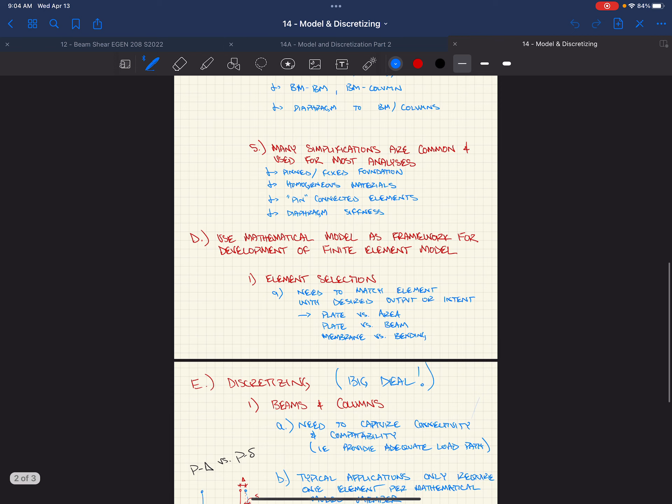So we did get through modeling and discretization, right? These huge jumps that we're making from the real world to the mathematical model, and then finally we're taking that mathematical model and discretizing it, putting it into a finite element model. We try to match everything as close as we possibly can, in an effort to highlight the thing of interest that we're trying to get out of our model.

Whether it's the base reactions, whether it's the reactions in a beam to design a beam in a braced frame, connection demands in a moment frame, right? If we're designing the foundations, we might do something different. Everything is tailored to what we want to get out of our model. So we make a lot of simplifications, which we did.

When we're doing that, documentation is incredibly important. I asked for some of that in the homework. I haven't looked at those yet - I'm a little scared at how brief those are probably going to be, right? You cannot have too much detail in those. Why would we want to document it? There are 5 reasons why you would want to document it.

Give me - yes, Brandon. Not get sued. Not get sued, litigation. Solid.

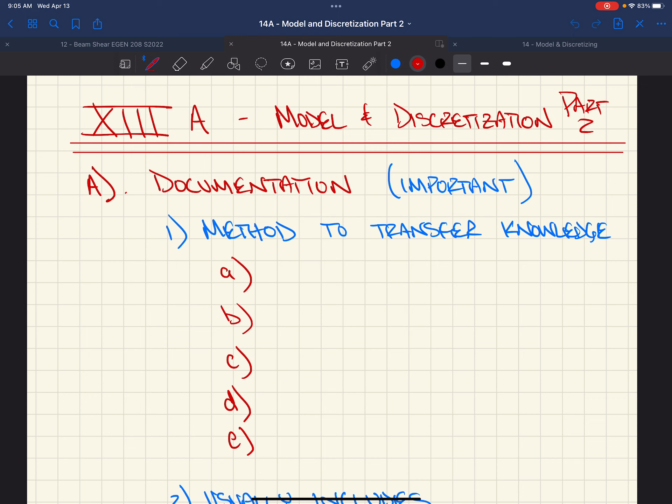This is huge. We had a project at the Yellowstone Club we were doing - it was essentially a bunker underground, okay? And the contractor messed up, they used the wrong strength concrete. It wasn't strong enough. It ended up going to lawyers.

Because the contractor was dead set on the fact that we were over-conservative with our calculations. We had to package our calculations up and send them to 2 other reviewing structural engineers who had to do third-party reviews to verify whether they felt what we did was reasonable, and whether there were any other ways we could get around the fact that we needed 4,000 psi and they had 3,000 psi sitting in place.

They screwed up when they sent the mud, so when they were testing it, it came out short - only 3,000 psi. They ended up having to water blast out this entire underground bunker basically.

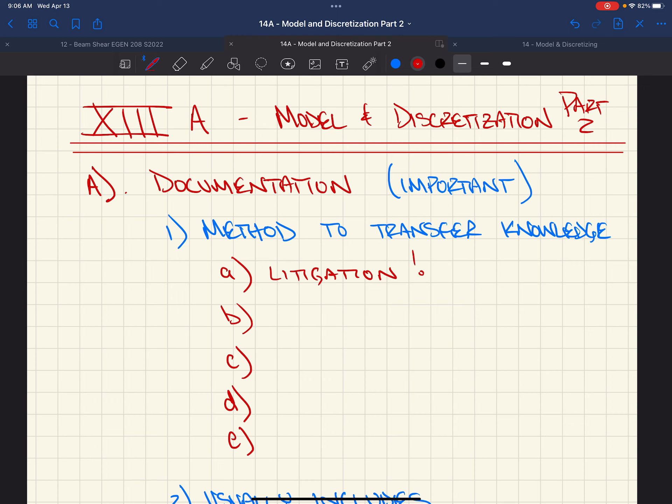Super expensive. So we wanted documentation. In that documentation was a lot of what we'll show here in a little bit - written language talking about what we were doing, but also little diagrams of the model. There was a model of concrete posts and beams, figuring out stuff, telling them what we used where, what the material properties were, right? All of that.

And so litigation is huge. Is there another part of what we do that would help to have documentation?

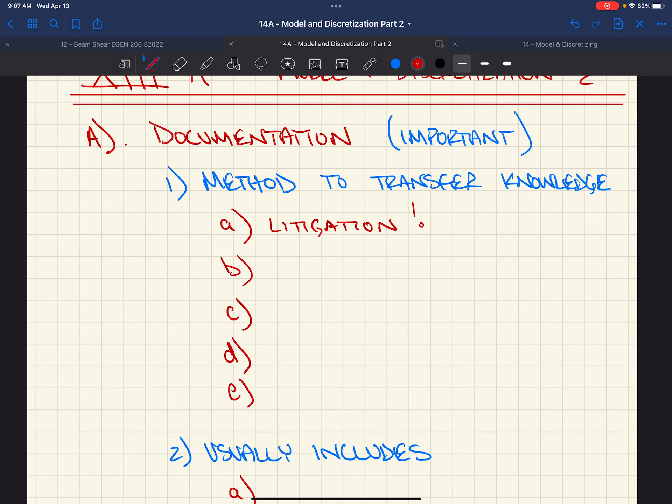Yes, Brandon. Honestly, just communication between coworkers during design. Dude, fuck yeah. You know, Brandon's really crushing it today, guys. I might just give him a password.

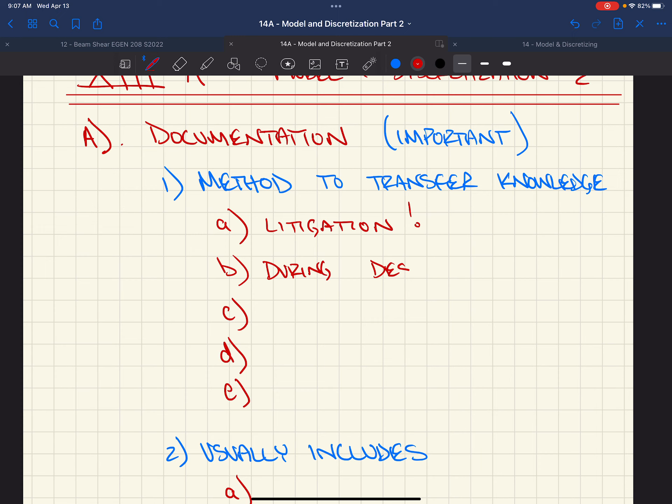All right, step it up. Step it up. What's another one?

During design, you might not be working on the same project throughout its entire duration, and you might take your calc binder and pass it over to somebody else. I did that when I quit. I had multiple projects I was working on, I had calculations I was working on. I just said, okay, here you go. And they needed to be able to go back and figure out what I was doing. Another one, kind of related, is coming back to a design after a long time.

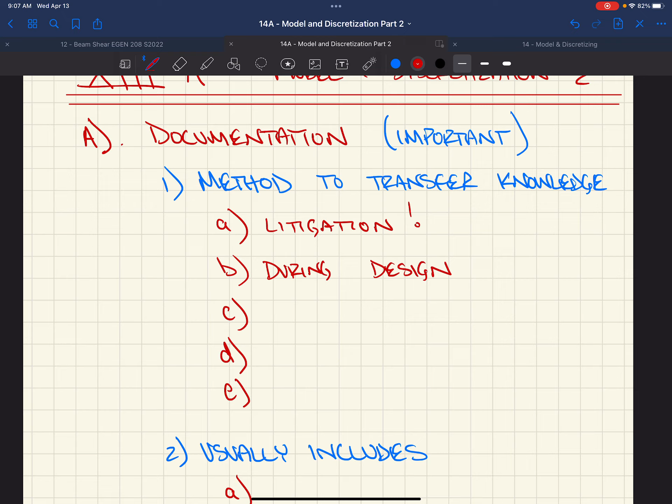Man, you guys are really crushing it. Retrofits. Renovations.

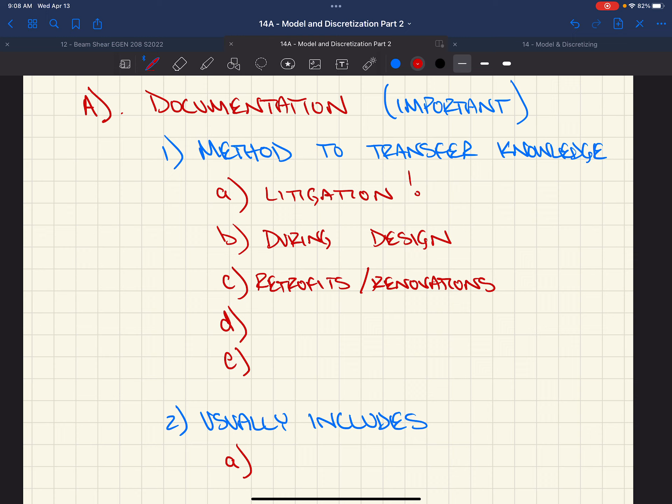There's been multiple projects where, more commonly when I worked there, we would get a phone call because the owner, when they looked at their documentation for their building, the structural drawings had our name on it. So then they came to us, and most of the time we could go back into the archives, basically a big storage room with a bunch of files, and pull out that calc binder for that project. So we started ahead, and that's the reason why they called us, since we designed it in the first place. Can we put a piano in this living room? Can we do this? Can we do that? Can we knock this entire wall out? So definitely, it's good to have documentation for retrofits and renovations.

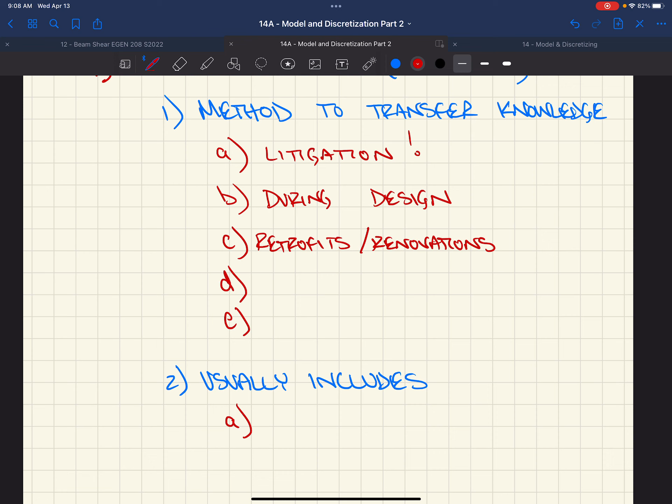As I mentioned, give me another one. Permitting. What's that? Permitting. Yeah, I guess I was gonna say construction admin.

Administration, they call it CA, that's the lingo, construction admin. When you're out there running a project trying to get things done, the contractor omits something and forgets to do something. Maybe they put 3 anchor bolts in and needed 4. Maybe they don't have enough projection to get a plate washer on there that you asked them to put on, like in a brace frame or something. So you need to be able to go back to the calcs and figure out, how did I do this? What was I doing? Can I omit this? Can we not omit this? How can we change things?

So in the construction admin side of things, future projects. I was gonna say third-party review. I said retrofits, renovations, we can call this future projects.

Any of the buildings on MSU's campus goes to a firm called Eskil. They are in California. Because we have to get a permit from the city of Bozeman, and when you do any project in the city, you submit construction documents. They also require you to submit calc packages. So we would scan hundreds of pages of calcs, and they get sent off. The city of Bozeman, to their credit, knows that they are definitely not qualified to be reviewing structural calculations of that magnitude. So they send it to a firm in California that's all they do. Then they come back and say, you forgot 6.6.3.2.1 in ASCE 7. How did you account for this? We didn't see it in your calculations. That's how detailed they get sometimes.

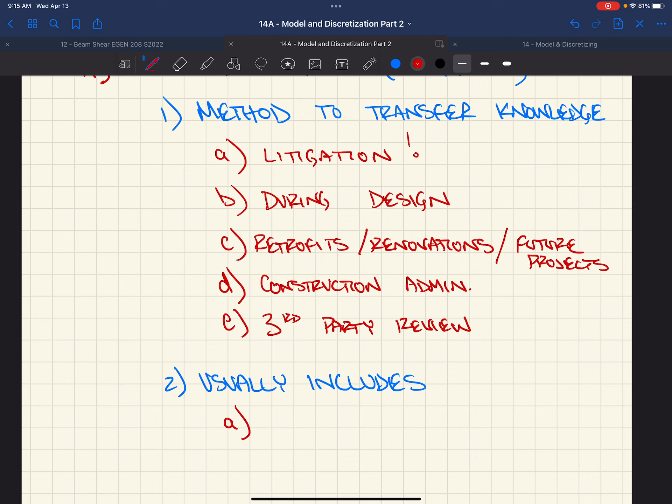So, all right, does that help, Ethan?

Yeah, cool. So, documentation - what does it usually include? Well, description of our mathematical model.

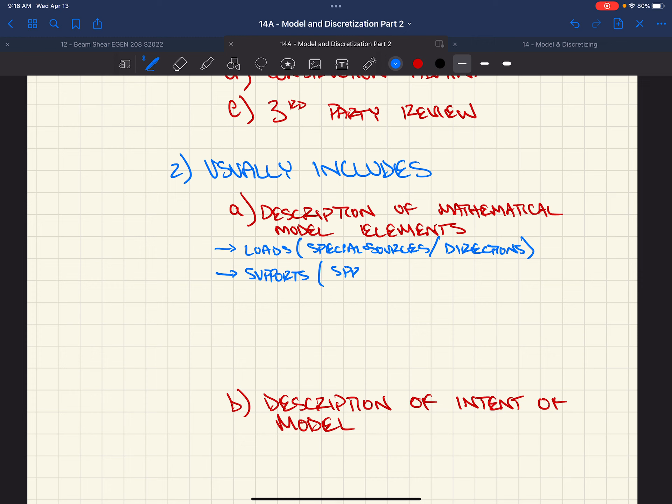What are some of the elements that we would describe that come from our mathematical model? Loads - are there special sources for these loads? Directions in some cases? What are some of the other elements in our models that we'd want to describe? Boundary conditions or supports. Springs. What type of fixity? All right, releases.

What other elements are out there? Assumptions - I guess I'm looking for real elements. Members - you want to describe members. Materials, especially with concrete, right? Releases, etc. We've got areas we use sometimes.

Spans, maybe loading type. Does it only load members? Does it load members and braces? A lot of times we have plates. Again, materials, releases - right, all important things.

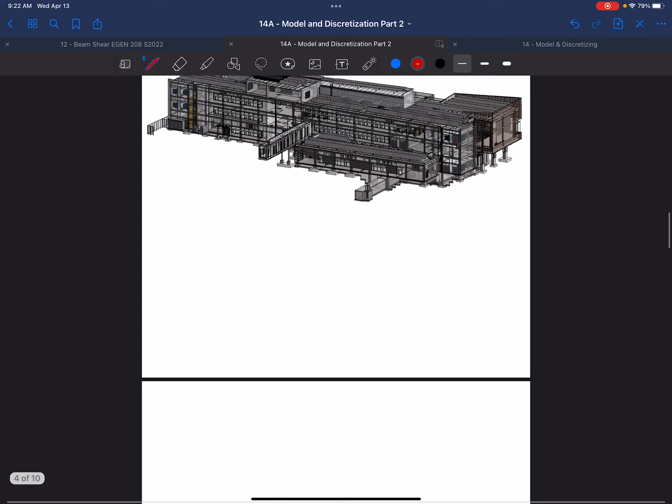Very helpful here - 3D views or renderings. Printing off the model in picture view, or even just the normal model, and putting arrows to it. So if we go back down to our model, being as simple as saying 'pin base column.'

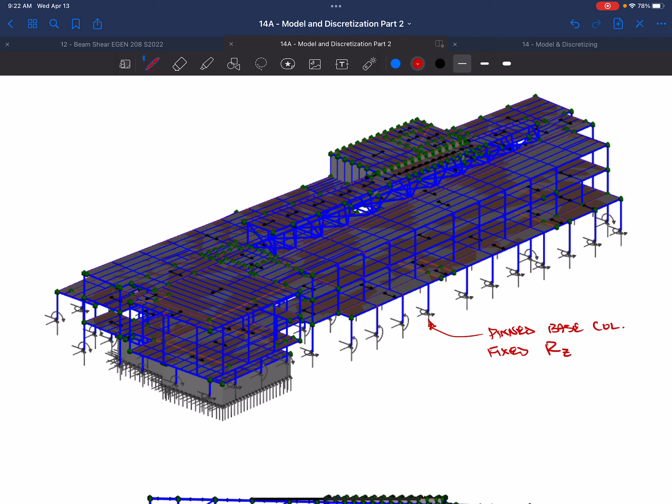Fixed RZ - yes. This is going to be off topic, but why did they choose to model it with those rigid links, to group the modal mass on the plates versus something else? Oh, you're reading the actual thing. Yeah, I was reading - trying to catch up. Well, I was just curious, why do we do that? We did that because we were trying to spread out that mass into the diaphragm the best we could.

Messing up your plate or something? What's the point of the rigid links?

So the reason why the rigid links are there is that it's an infinitely stiff member. In RISA, if you go and model a member, under the type of member, you have standard parametric, you have your database shapes, and also in there is an option to do a rigid link. A rigid link is an infinitely stiff member.

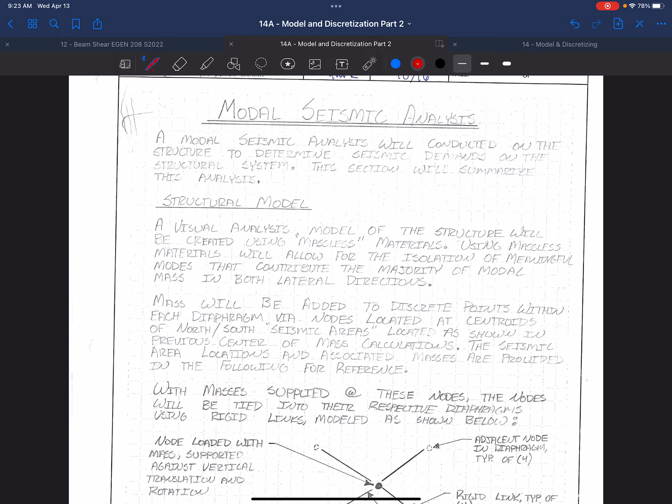So when it's fixed, it does not move, right? It's not going to deflect. It's going to be a straight line regardless of what its orientation is. So what did it do here? Well, it allowed us - and we did this on, this is NAIC, but it's also like Miller dining halls.

We put the mass of the diaphragm at a given point. If we loaded that one node - the reason why we're doing this is some of you guys haven't had dynamics - but seismic demand is all based on mass, right? So wind loads are based on projected area. Seismic load is all based on mass. We are physically accelerating based on the excitation of the ground. So the load doesn't come from outside, it comes from within each of the members in the building.

There's 3 different levels of seismic analysis. We have equivalent lateral force. That's saying that we're going to punt as engineers and be very simplified and say, okay, it's all based on mass. It's actually pretty complicated, but we're gonna just distribute the load at each of our diaphragms vertically in an effort to mimic what the building would look like if it just rolled over with what we would call our first mode of vibration.

The second one, which you end up having to do if your building is in certain categories and has certain what we call irregularities, then you jump into what we would call a modal analysis. Instead of actually physically shaking the building - we're getting to that point - before that they say you can simplify the analysis. It's going to be more in-depth than our punting method, where we're actually going to start considering the stiffness of our model and the mass distribution in our model.

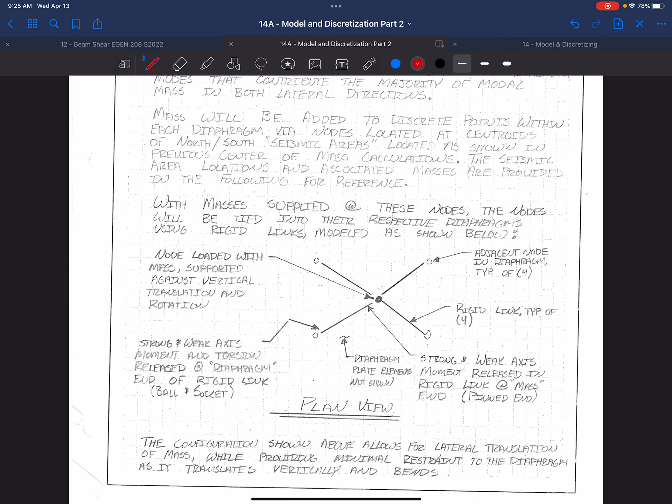So what happens if you leave self-weight on in the model? Any ideas? If you leave self-weight on, every member in this model has self-weight, has mass. If you leave that on, what do you think will happen? You get a mode for every single member, which destroys the ability to actually analyze it.

So as an engineer, you have to think about what am I really trying to capture out of this. Do I care that at, say, 150.2 hertz, this beam over here is gonna start vibrating up and down? That's really not gonna give me anything relative to what my moment frames in this building really care about. So what we decided to do was hours and hours of discussion of how to simplify the model effectively in order to capture the behavior of intent - the behavior of what's going on, or what we really want to see out of this, without oversimplifying.

So what we decided to do was, okay, we've got this mass. Most of the mass, we could say, lumps in the diaphragm. We're gonna take half of the mass above and below, and put it into this diaphragm. Now we're gonna start pushing on this diaphragm.

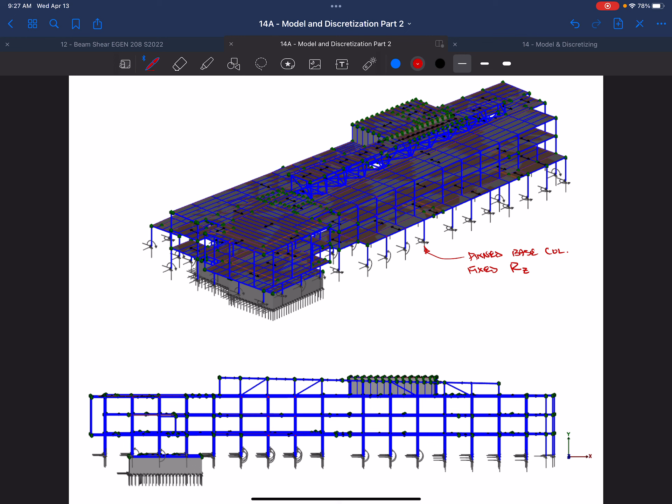Well, if we distributed that mass into all like 100 nodes around this diaphragm, we still are gonna get really weird natural frequencies that might be in the vertical direction that aren't gonna contribute to the lateral demands on these frames. So what we ended up doing was we would create mass on a node, and then reach out and connect it to our diaphragm. We had to connect it to our diaphragm in such a way that we're not adding to the stiffness of the diaphragm, but we're gonna be pulling on it. So that's what this is all about - we've got a node with mass.

And it's sitting out here, right? We're gonna put it out in the center of mass of the diaphragm.

The other thing in modal analysis you have to take into account, in seismic design, we're guessing at where the mass is. As engineers, we're making a lot of guesses. That's why in load combinations for ASD and LRFD we have 0.6 dead and 0.9 dead, because we are guessing when we're designing Roberts Hall as to what it's actually gonna weigh now and also in the future.

It might change use, right? And so we do the same thing in seismic demand, the code recognizes the fact that we're guessing that we know where all the partition walls are, all the exterior wall elements, what everything is made out of. So we're not gonna be super accurate about where that center mass is, because the center mass is really gonna be where the force is, since it's all based on acceleration.

And so in this case, we guess where that modal mass location is. We're gonna do an accidental eccentricity value that the code requires us to do, 5% of the lateral dimensions of our building. So we end up starting to move this node everywhere.

Well, it gets pretty complicated if you had 100 of these mass nodes spread throughout the diaphragm, and we have to start moving all of these in all these different models. So we decided to say, okay, I'm gonna lump the mass in one point. On top of that, I don't really care about the diaphragm going up and down.

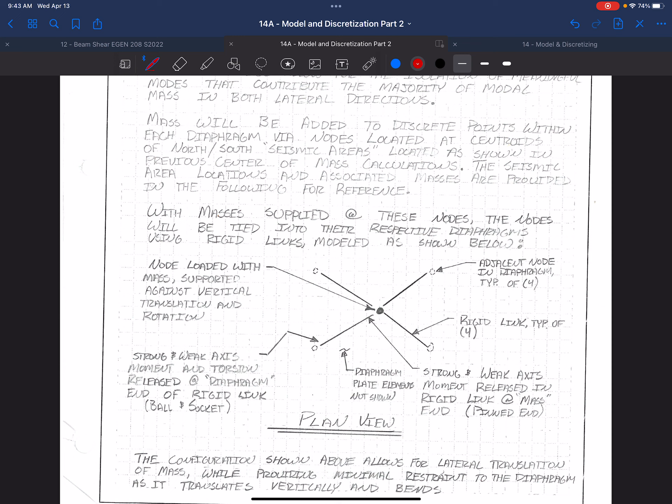it. Okay. So. You're down to 7 minutes.

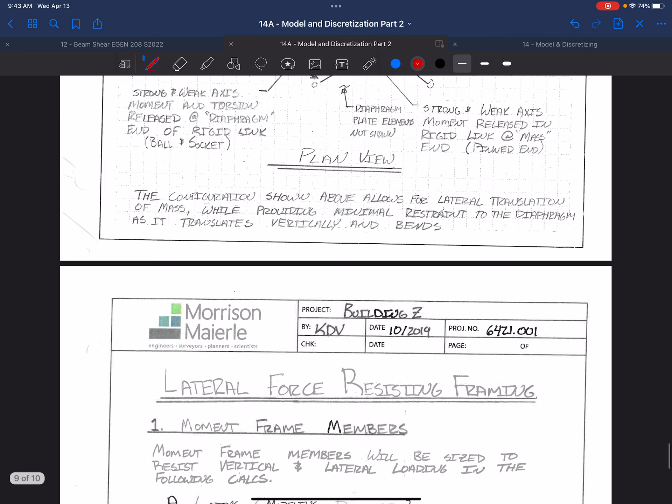So we've got these short excerpts from some projects at Morrison Maierle, some descriptions of lateral analysis, how we decided to model it, put nodes, and why we felt about it. With masses supplied at these nodes, the nodes are tied into their respective diaphragms using rigid links modeled as shown. The configuration allows for lateral translation of mass while providing minimal restraint to the diaphragm as it translates vertically and bends. We're explaining to someone reviewing this what the intent of our model was and why we did it that way, so we could defend it later on.

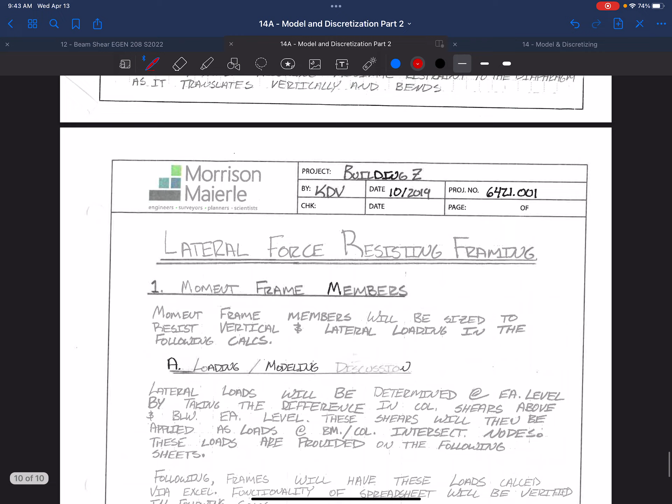In this case, all we did was take loads from a spreadsheet which allows us to take a rigid diaphragm. I don't know if you guys did that in concrete too. If you have a rigid diaphragm, you have a torsional contribution and a translational contribution of shear in each of your lateral elements based on the stiffness of that. We built a big spreadsheet that distributes the load based on the equivalent lateral force procedure.

Then the code makes us do other things, making sure we consider 100% and 30% in our two directions. That's also based on our vertical irregularities - we have two tables for that. Based on our irregularities, the code makes us hit our building with all the seismic load in one direction and 30% in the other direction.

With wind loads, they make us do a quartering load, which will give us 75% in our two orthogonal directions. On top of that, seismic loads, right? If our system isn't redundant, we got a 1.3 factor, all sorts of stuff. We talk about that if we're doing stability in this analysis also, so we reduce the stiffness based on section C, Appendix C. On the bottom it says 270 of 514.

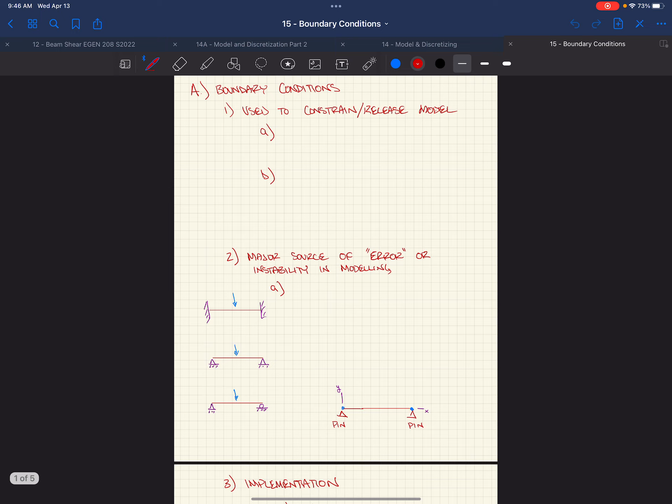Yeah, okay, so lesson there: make sure you document, document well. There's no such thing as not documenting, or documenting too much, right? Making sure someone can follow. That's a hint on the homework moving forward - making sure you document the models that you create.

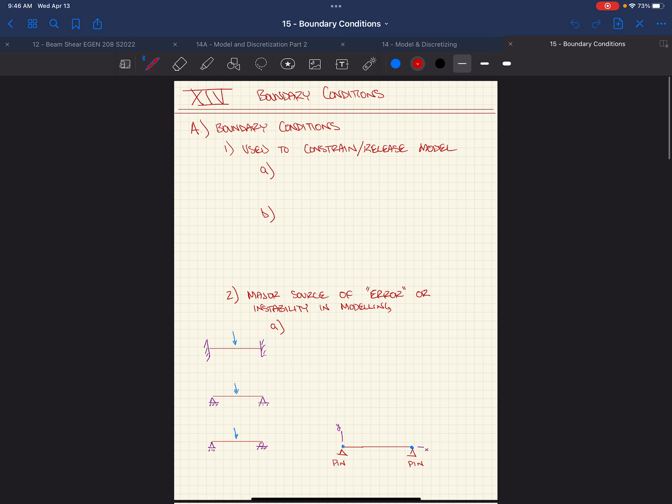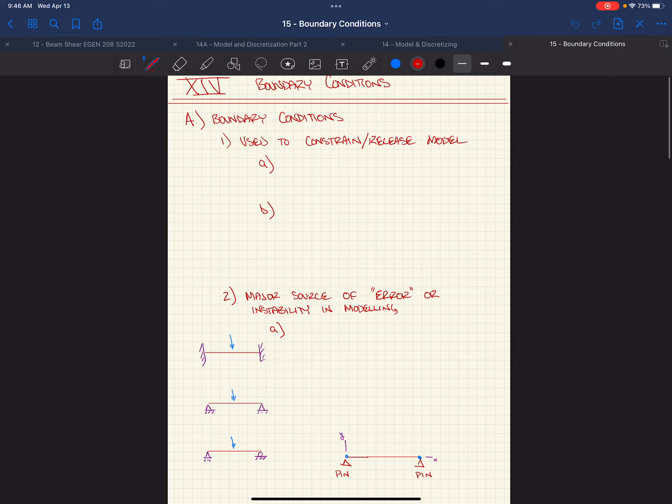Boundary conditions - this is a huge part of the overall modeling process. We use this to constrain or release the model. We do this because we need to provide global stability. We're taking the inverse of K, right, or RISA is taking the inverse of K. We cannot have that thing being singular.

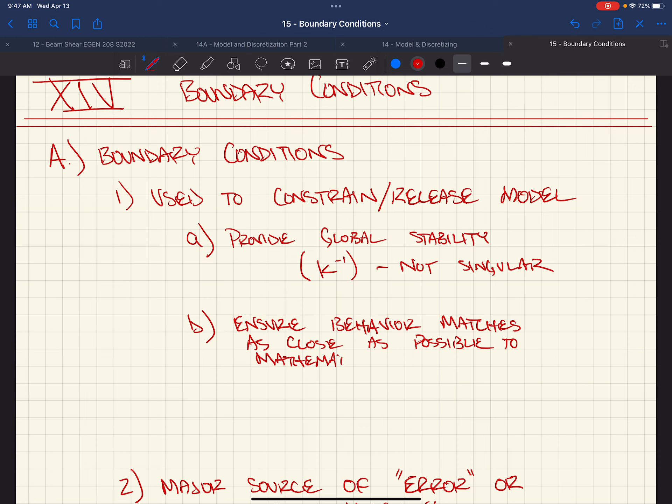Boundary conditions also - we constrain and release the model so that we can ensure the behavior matches as close as possible to the mathematical model. All right, we do this at connections and supports.

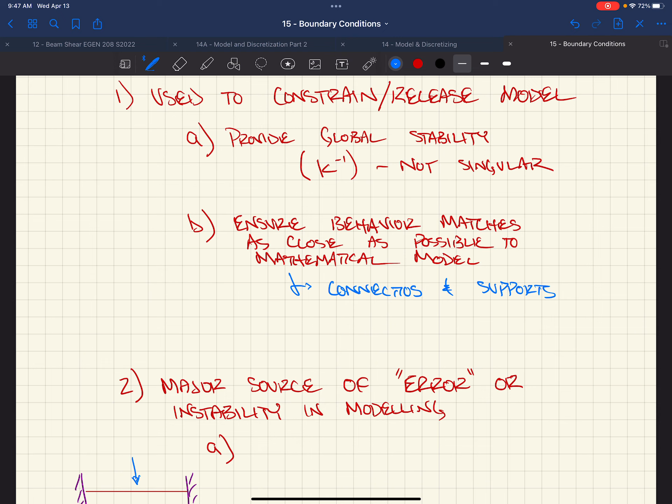And that's where we impose boundary conditions. We do it at nodes - this interconnecting of plates, interconnecting of members, where our model is ultimately supported outside. Our free nodes, where we have maybe just one element connecting to it.

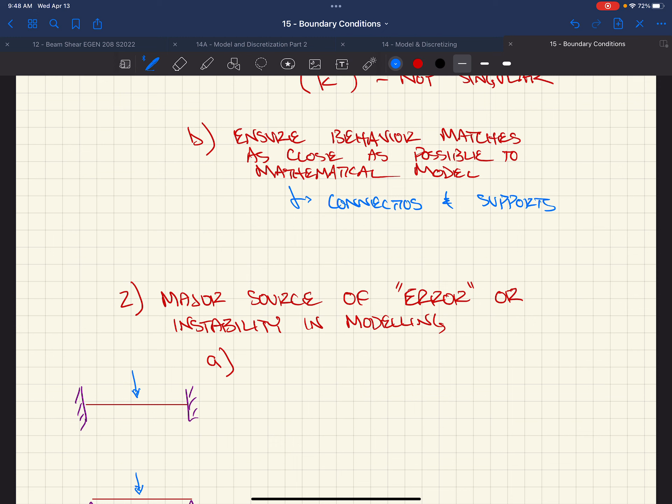Boundary conditions, I'd say, are the major source of error - quotes error, error is relative, depends on what you're trying to model and the fact that we're making a lot of simplifications. Error or instability in the model - if the model doesn't run at all, likely it's based on boundary conditions. You haven't adequately supported or you've under-supported the model, right? It has rigid body modes. It might just be able to travel in a direction in free space, and even though there's no loads applied in that direction, it might have the ability. We have no stiffness in that direction, so our stiffness matrix becomes singular.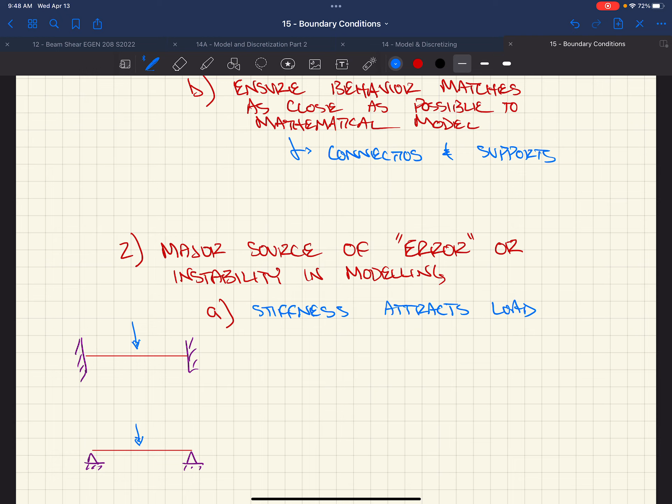So when we do this, we want to make sure that we consider the fact that stiffness attracts load. Over-constraining can be a problem - over-constraining the problem can result in inaccurate load path.

You might say, okay, well, this thing's just going to run if I fix all my nodes. Well, if you fix every node in your model, that's essentially saying that it is just frozen out there in space - there's something out there holding onto it and not allowing it to move. That can have huge effects on whether or not members are adequate, what your displacements are, things like that.

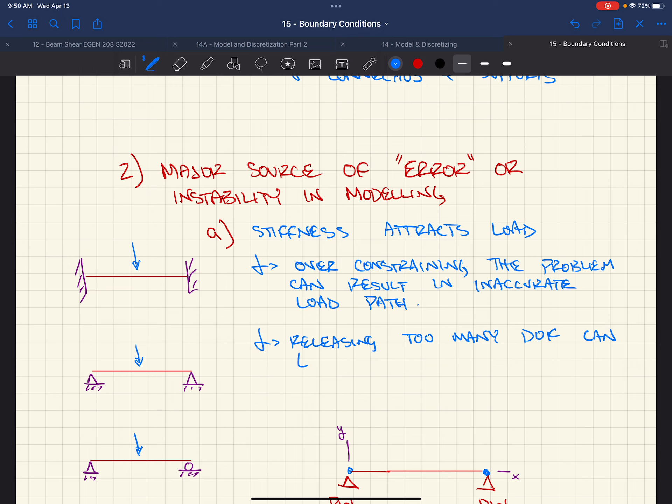Releasing too many degrees of freedom, on the other hand, can lead to instability, or again, inaccurate load path.

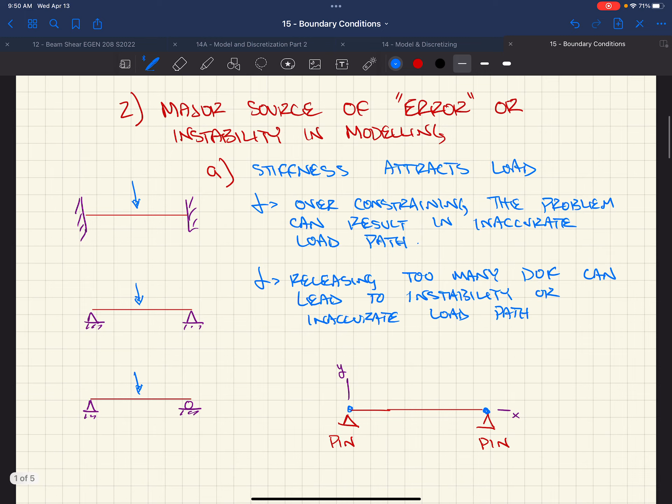We have a beam element sitting on the left-hand side. It's got a point load in the center of it. Big difference between fixed on the ends versus simply supported - the ability for load to travel, the displacements of these two mechanisms. We go from here to here. Now we start releasing the lateral movement of that member, so we've got this versus that versus that. What does all of that do? It changes the ability for load to travel through our model.

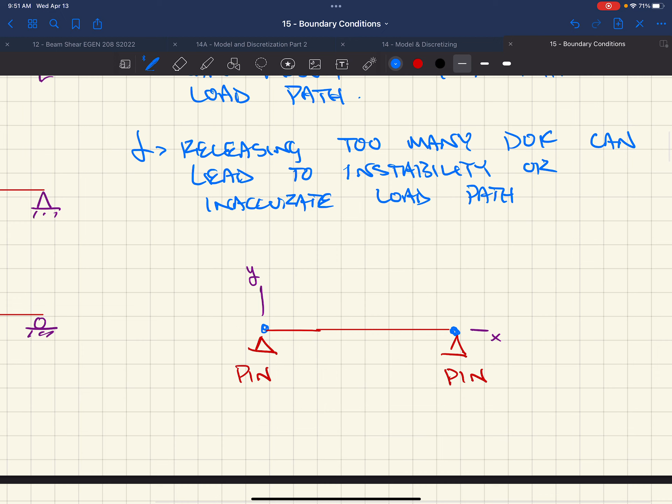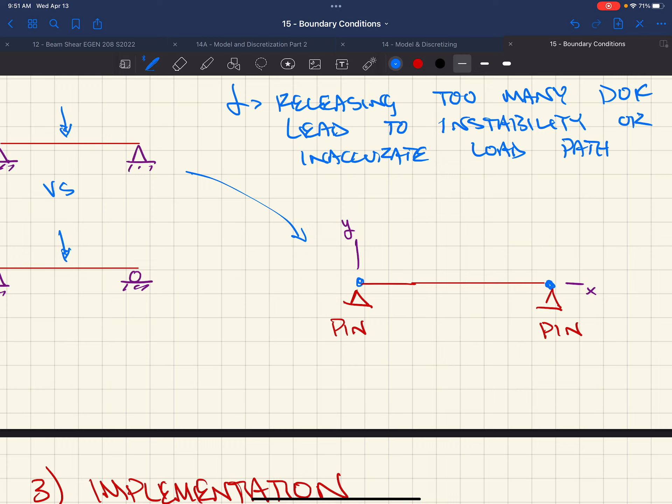So you might have one member in a series of 1,000 that have this based on you going through and giving all the releases, and then the thing won't run, and you go through every single one of them. We'll talk about troubleshooting next week. Okay.